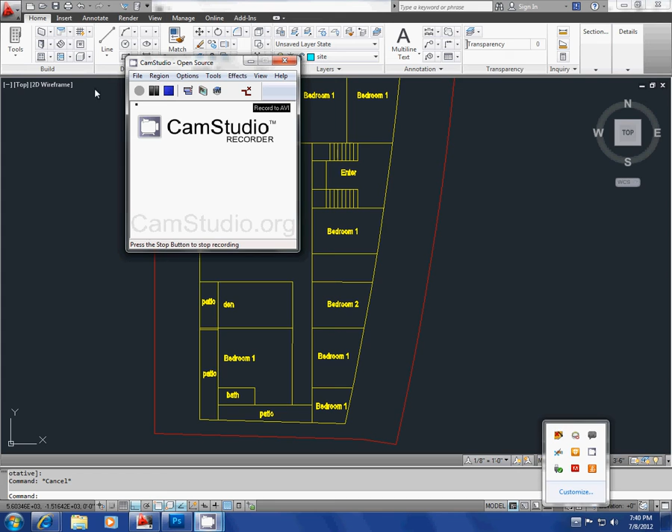So this is an example of how I'm going to show you guys how to do a 3D topo. I already do know some of the major information that I need. I know that the street at the top and the street at the bottom, the difference is 95 feet. I already know that, okay?

So what I'm going to do is whenever I draw topos, I use a spline. Spline is SPL, shortcut for spline, okay?

So what I'm going to do is a quick little trick. I'm going to press Layer ISO, so it's LAYISO, enter. Click this here, bam. It just isolated this here, okay?

If I want to bring everything back and unisolate that, it's LAYUNISO, layer uniso, okay? Very important, remember that. So layer ISO is LAYISO, enter. You click the layer, boom.

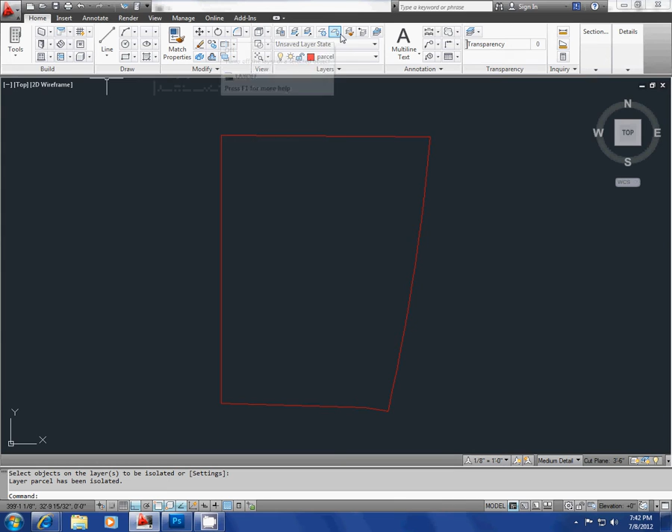Now you've just isolated that one layer. It makes it easier so that you don't have to go through your layer manager and do all that. Jim mentioned that sometimes you're more comfortable remembering how the button looked, the little icon here on your palette. I'm an advocate of learning all the shortcuts, but you're also welcome to use here's layer, isolate, unisolate, etc. But I'm going to test you on the shortcuts, so you can find them here on the home palette.

So essentially what I'm going to do is spline, SPL, it's also right here. And then I'm going to draw.

Without my ortho on and without my O snaps on. So I turned off my 2D O snap. O snap is F3, and my 3D O snap is F4. That's new in AutoCAD 3D, so make sure you know the difference of the two. The reason why I'm doing that is because splines are 3D, and they will snap to 3D objects. If something's way up above, it'll snap to it.

What was that command just now? Spline is SPL, enter. To turn on and off your 2D snap points is F3, and to turn on and off your 3D snap points is F4.

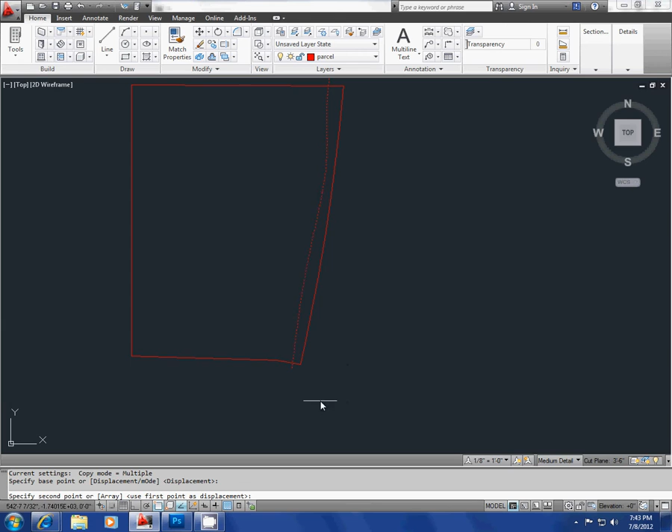So what I would do is I would then copy this over. And this is a sketch, okay? It's not super accurate, but I want to show you guys an example.

So essentially what you would do is you would get an as-built drawing, a survey, and if it's just a drawing, I would bring it into AutoCAD as a PDF and trace it over, right? And then I would draw these lines. Typically your survey should say each line is different by 5 feet or 2 feet or 3 feet. So then what do you do?

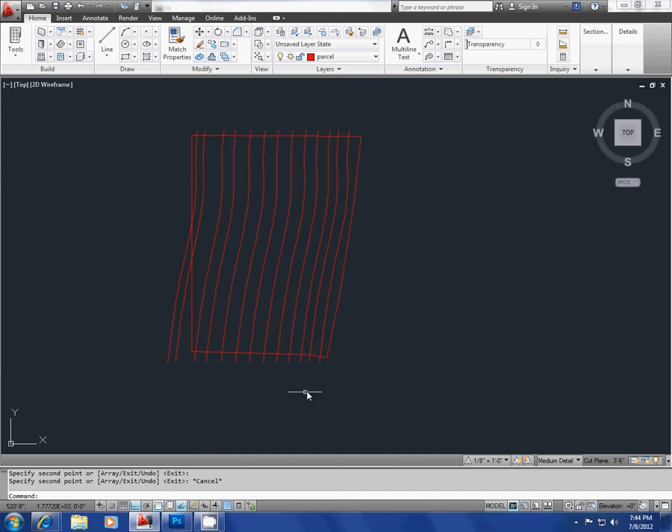So you would go into 3D space. You hold down shift. I know it's not a 3D AutoCAD class, but be aware that AutoCAD is 3D. Hold down shift, now you're in 3D space, okay? And your shift plus middle scroll button puts you in 3D space. Yeah, of course.

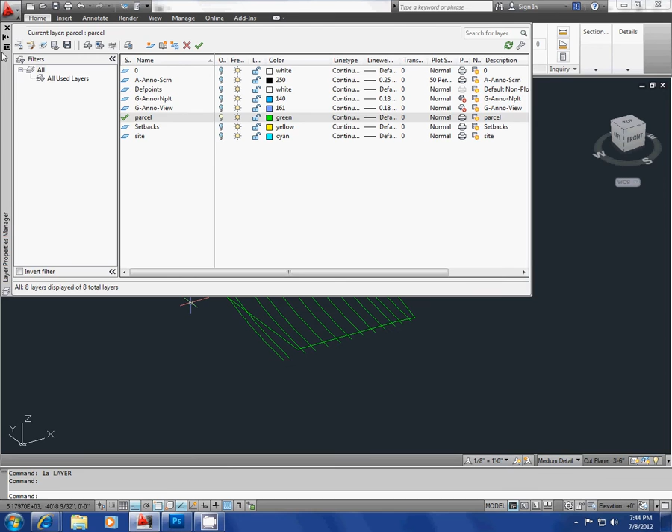LA, enter. Bam, voila, right? If I wanted to extrude something, I press REC, that's my rectangle. Press EXT, enter, that's my extrude. I could press shade, just type in the word shade. You can see that there.

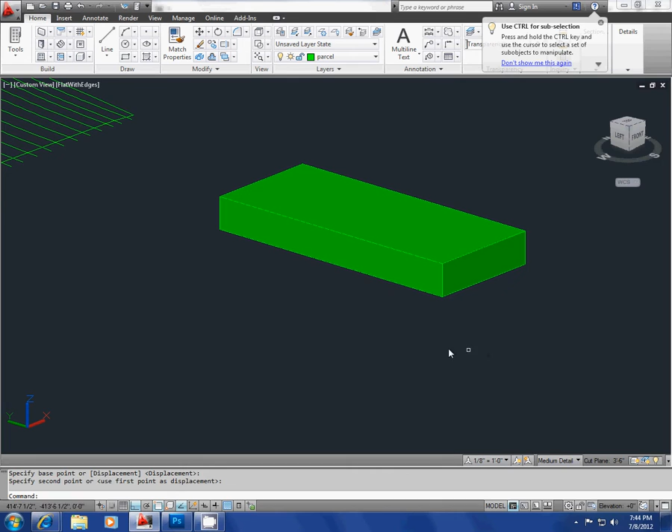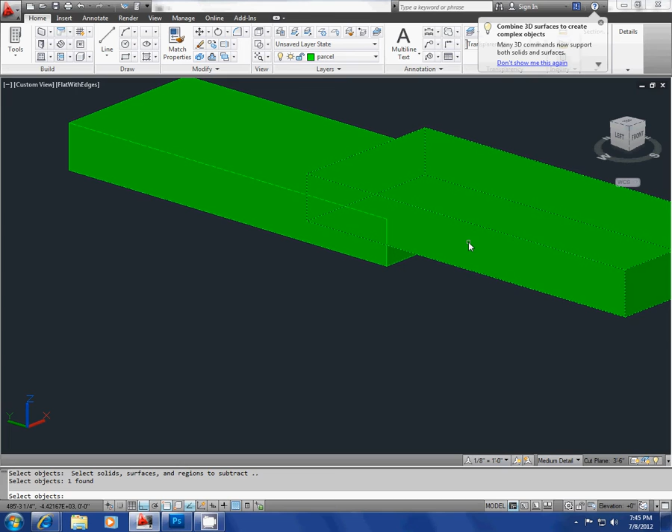And then you could just copy this. CO, enter, copy that. If I want to have a cool little step in there, I would press SU, enter. From the main space, I would click the main object, press enter, click this space. This is what I want to extrude from the main. It'll extrude, it'll subtract from there.

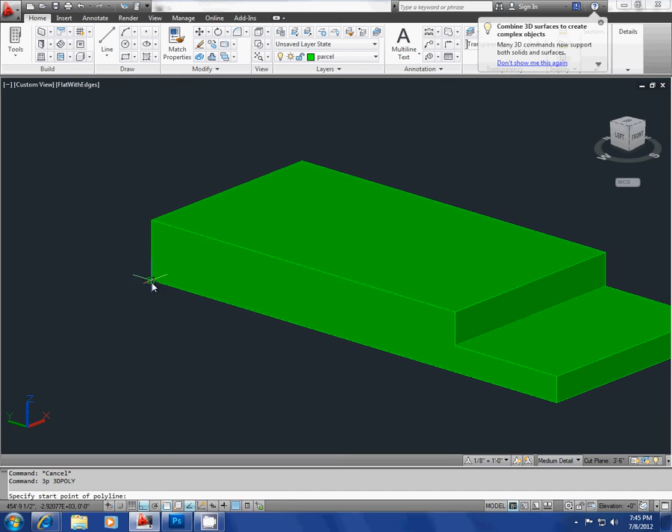Okay, right? Also, if I wanted to extrude along a path, right? I'd press 3P for 3D polyline, draw here, here, and here as a guideline. That was just a guideline, right? So I just drew in 3D space.

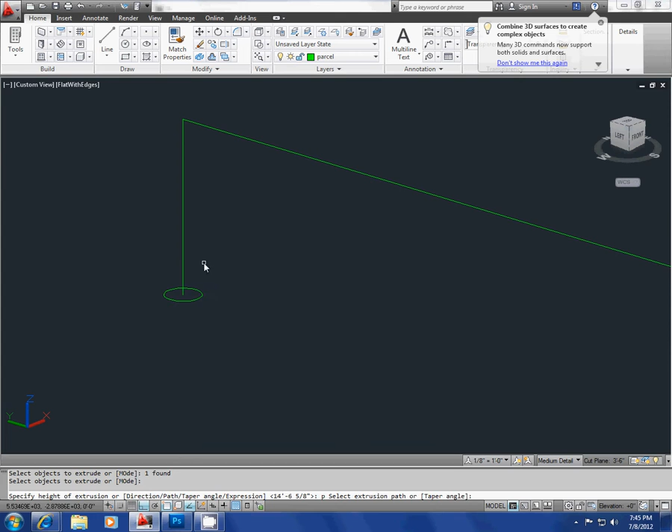Press C, enter for a circle, right? Press XT, EXT, enter. Click this, and it's asking me do you want to just extrude regular, or extrude along a path? Press P, enter, bam, okay? So you just extrude along path.

So that's all in the video, so I'm going to expect you guys to at least know the shortcuts and how to do it, okay?

If you wanted to do a wall, type EXT, enter. Boom, there you go, that's your wall right there.

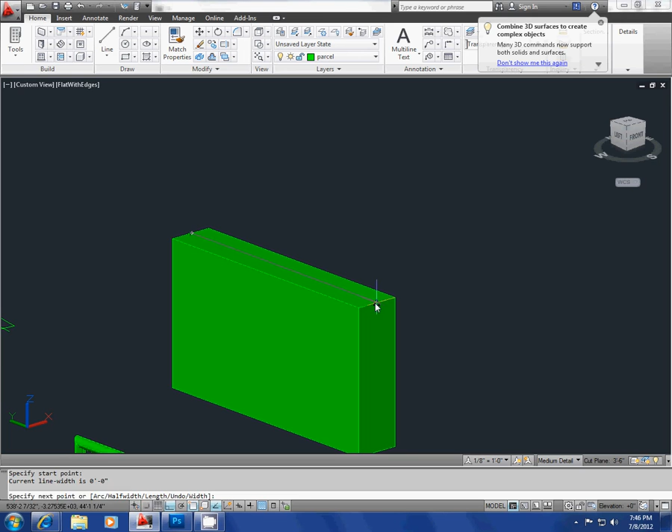And if you wanted to do some type of window off of that wall, you could draw a line there, press EXT, and extrude just the line. I'm going to press delete, press EXT, do that line, and then voila, there you go.

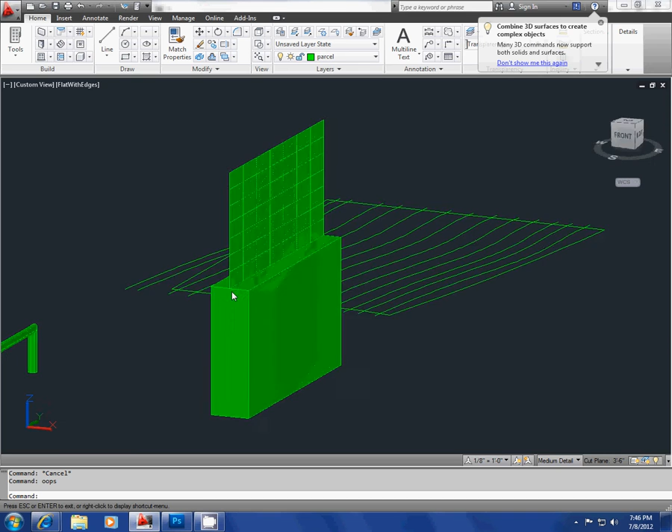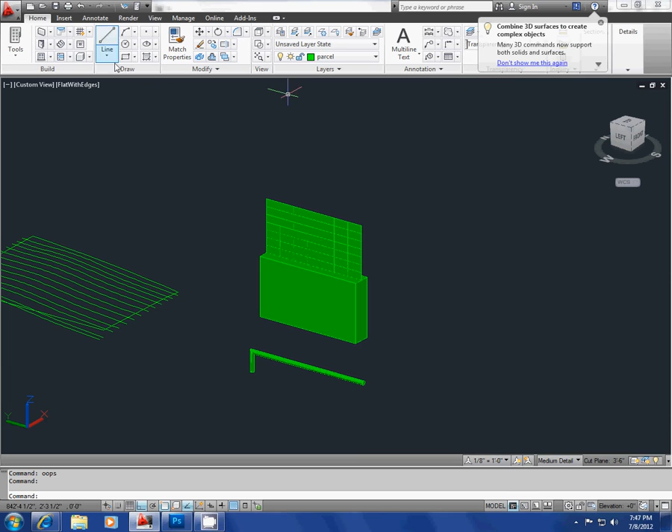This is not a 3D modeling class, but I want you guys to be aware that AutoCAD is super duper strong. I could model anything in AutoCAD and challenge anybody in Rhino, and do it straight up, because there's NURBS modeling, there's everything modeling now. Anyways, I'm glad that's on the video for your reference.

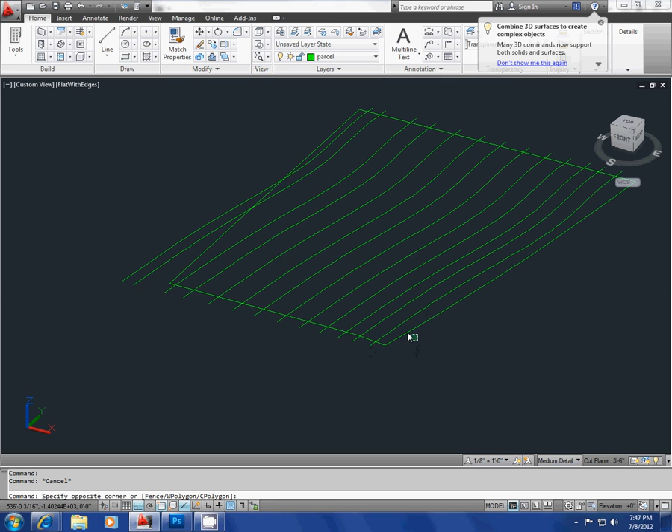So the next step is I'm going to change the level of these topos. What I'm going to do is change this here to a different layer so that it's gone.

I'm going to select that, press M for move, and make sure my ortho's on. If ortho's not on, it won't move in the Z axis. Essentially the Earth is all on the X and Y axis, and up is the Z axis.

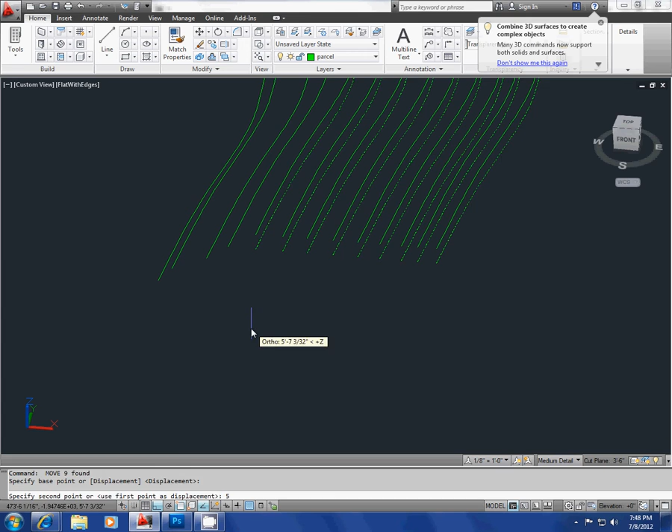So I'm going to press 5, enter. 5, enter. 5, enter. 5, enter. Oops - make sure that your ortho's on.

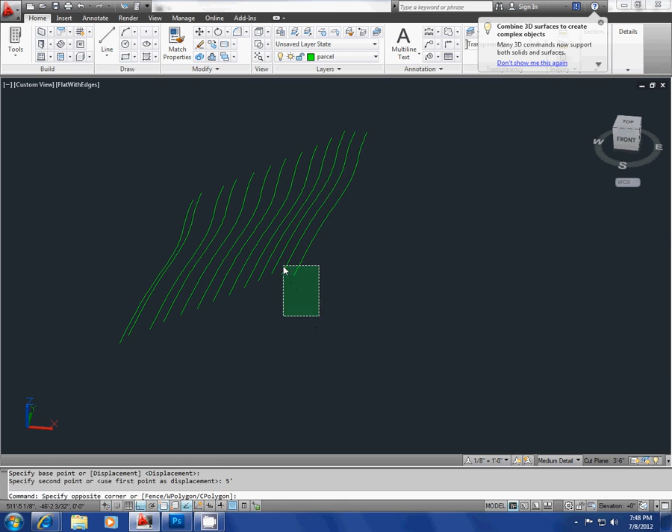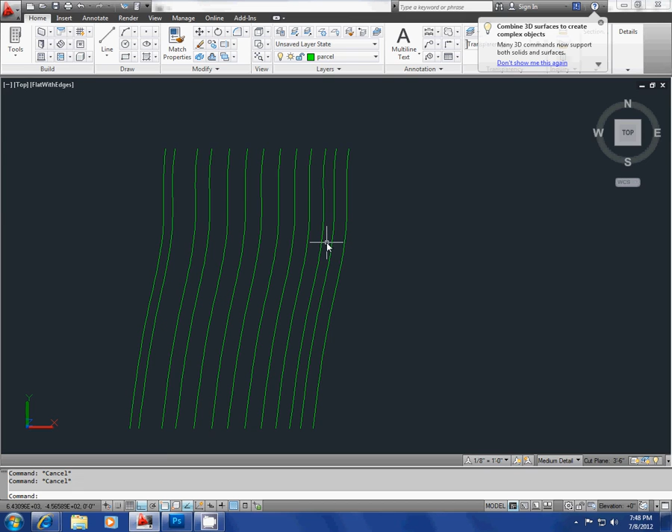So this is kind of like just the basic part of it. I'm going to press PLAN to go back to plan view, and then press LAY on ISO, right? So now everything's there - that's essentially how my site looks.

But theoretically, I want you guys to do your topos much more detailed, make sure they're 5 feet difference, but make it cater to your presumed building pad. Jim has his presumed building pad - he's going to have his bar, and he's also going to cantilever. So do an assumed building pad, and essentially this is it here.

So here is the entry. If I want this whole area to be flat, I would start to go like this - I guess you don't have to do that because Revit does it for you, it's kind of cheating.

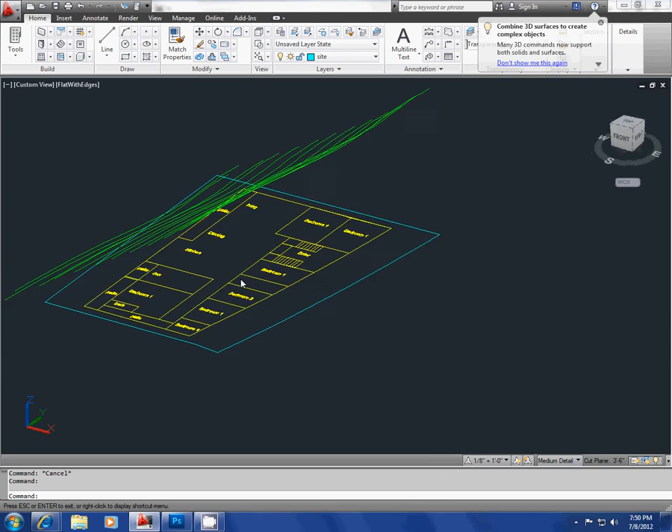How do you do that 3D view? Press Shift and middle scroll. Hold down Shift and hold down middle scroll, then move your cursor. No, what's middle scroll? The middle scroll button on your mouse. The middle button. Okay.

I'm wondering, should I bring this into Revit and show you guys how to do the topos, or should I hold off for the next class so you guys can finish your space plans and print them out, then review these videos and make sure you got all those shortcuts? Then we'll go over the topos and the pad and jump right into Revit. I think that's fair enough since it's only about 10 minutes - I don't think I can cover the topo in 10 minutes, and I don't want to rush and hold us over since it's Sunday. Fair enough, or do you guys want me to stay over 15? It's up to you guys.

Revit? You guys want me to bring it to Revit? Sure, okay.

So I am going to save this file here. I believe it's on my desktop, and I'm just going to name it site - doesn't matter. The next video will be how to do a topo in Revit.